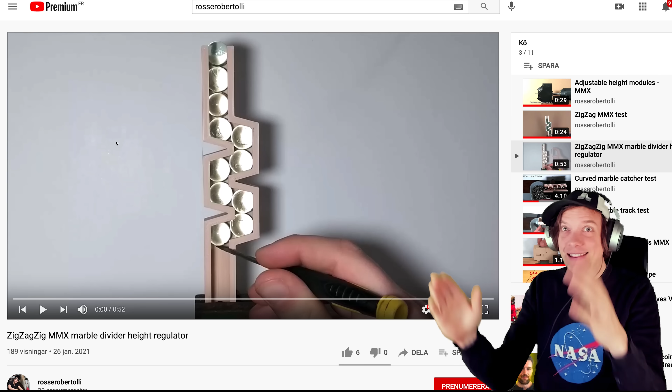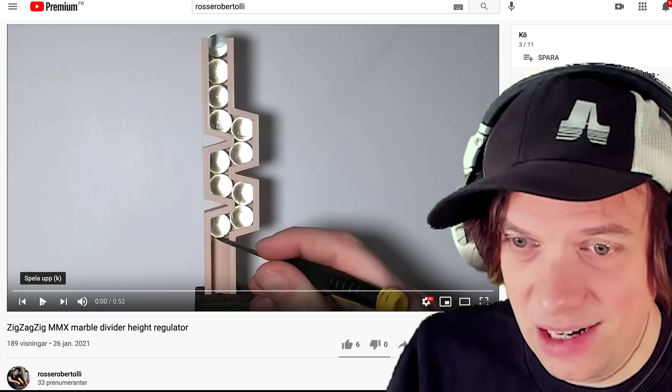In this design review, I will review some mechanism ideas from Rosse Robertolli. Rosse has made all these prototypes and these videos. Perhaps the original ideas are from Rosse himself or from the Discord community. I don't really know. Let's go.

Next design. What is this for sorcery? Curved marble catcher with constant contact radius, regardless of the height of the marble queue. So this is for the top of the marble divider - regardless of the height of the marble queue, the free-flowing marbles would flow equally fast, I guess. Adjusting the height, cool.

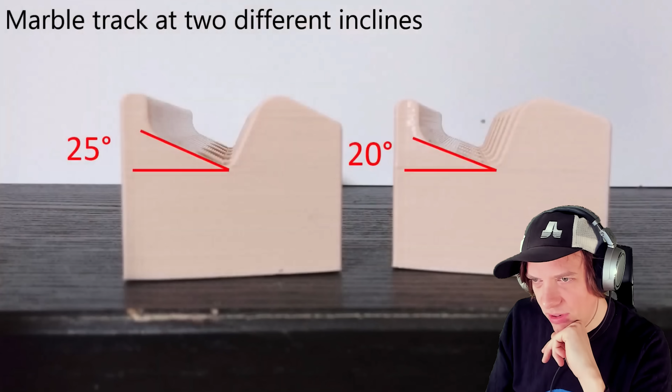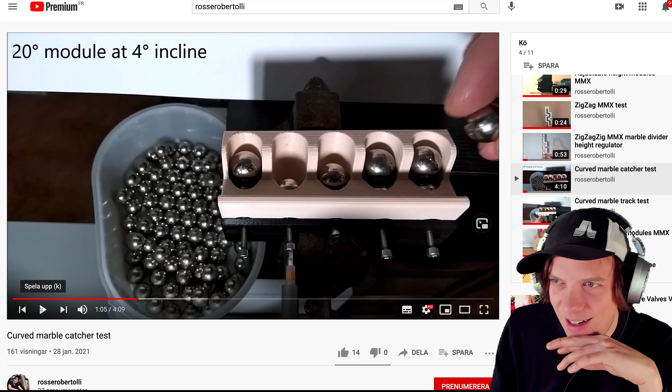4° incline - yeah, I think on the marble divider it's about 4. That is so cool. It's basically taking the same principle I have in my current marble divider, but making it unsensitive to top marble height. Simple, brilliant. I don't see a single marble on the floor also - clean floor envy.

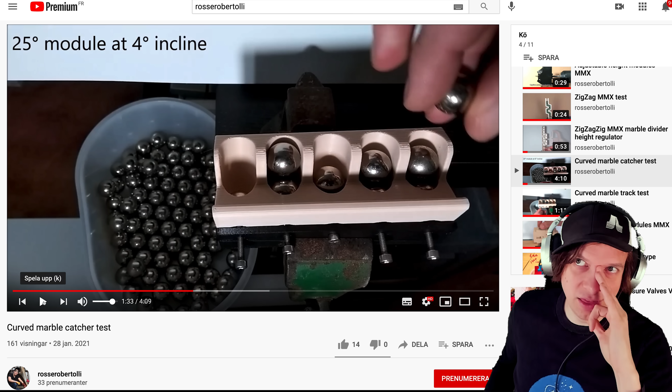Wow, this looks like it would totally work. At the moment on the machine, I think I will fight for my current marble divider, but this is just an amazing solution. I'll give this design 2 marble dividers. It's absolutely great. Next design.

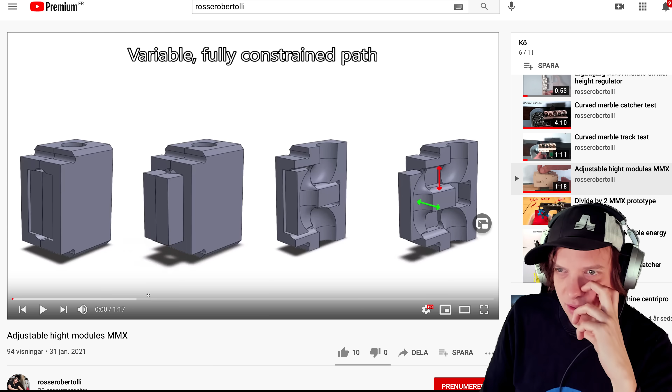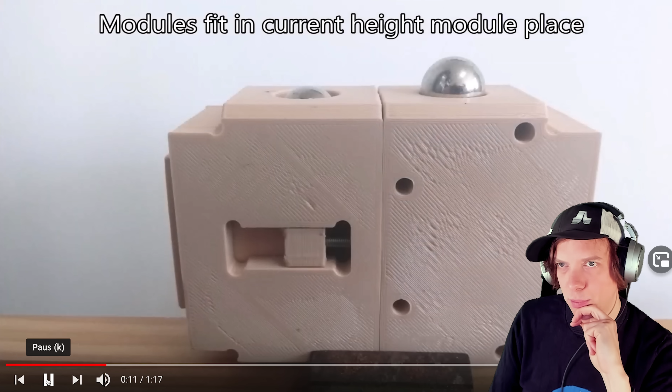So this I think I've seen from Andre Schur - the idea. This is the adjustable height modules, for the top height, CNC machinable from plywood. Oh, you already designed it. Wow, 2 marbles adjustment - let's look at that again. Wow, modules fitting current height module place. That's awesome, I thought this was much bigger.

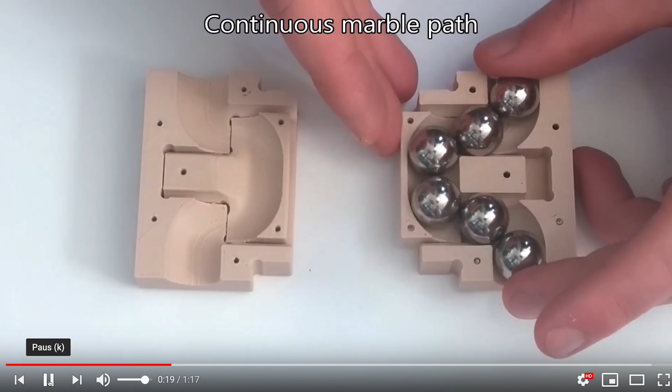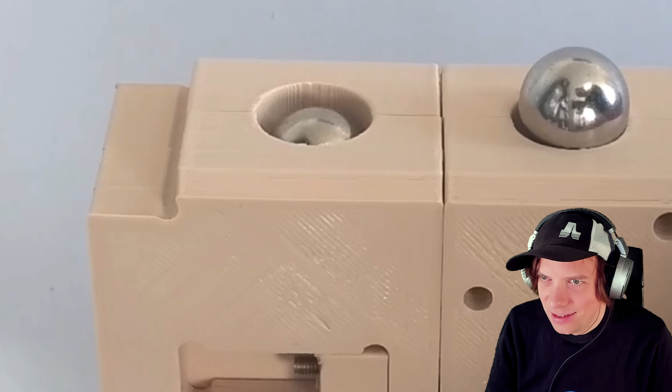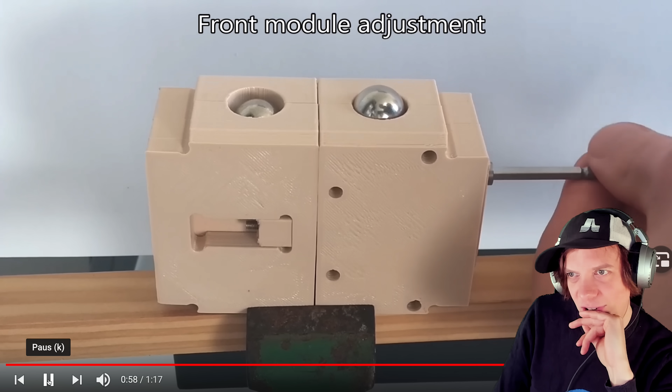I thought they were bigger. I didn't know I could fit them in. I definitely need to try this. Oh, this would be a dream. Rear lowering. Next design.

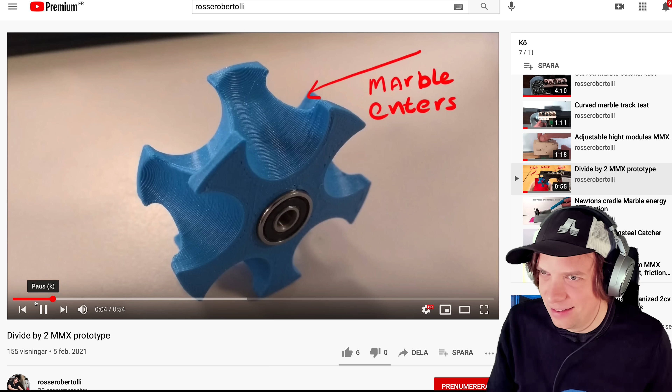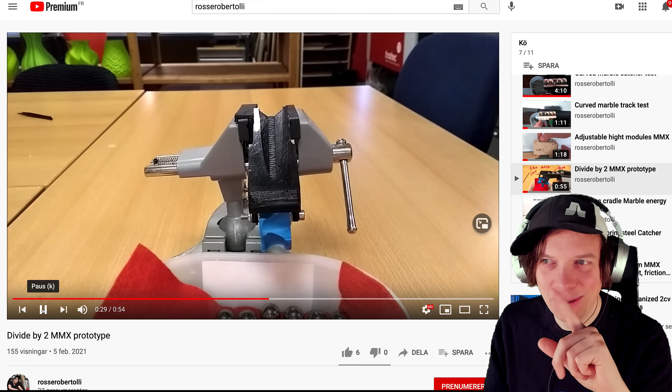What devilry is this? Divide by 2. Oh, that's so beautiful - yeah, it's like a flip-flop but much faster. It's brilliant. Oh wait, did you hear what I heard? There, that's a marble going on the floor, hitting like the bottom of a chair or something. It happens to the best of us.

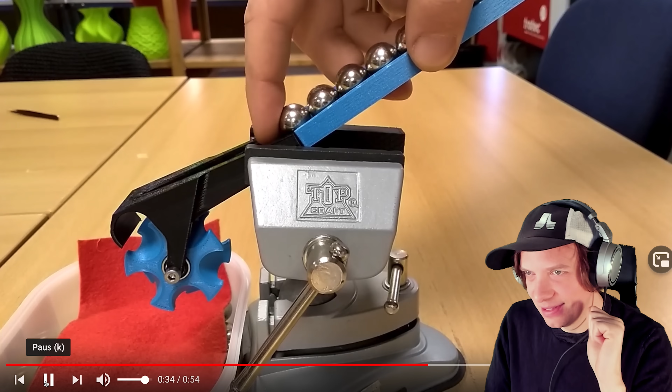Damn, I'm happy to see a fellow floor marble from someone else than myself. I'll give this design 2 flip-flops. Next design, here we go.

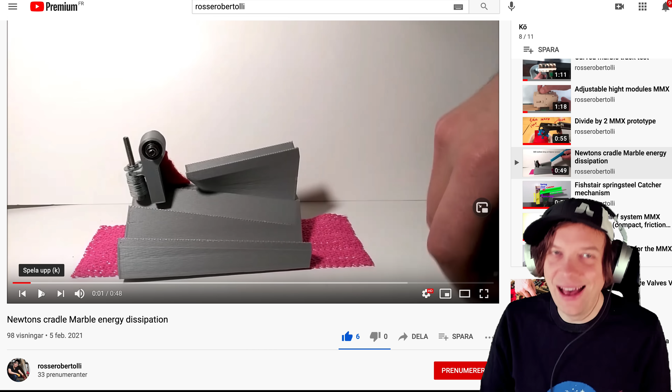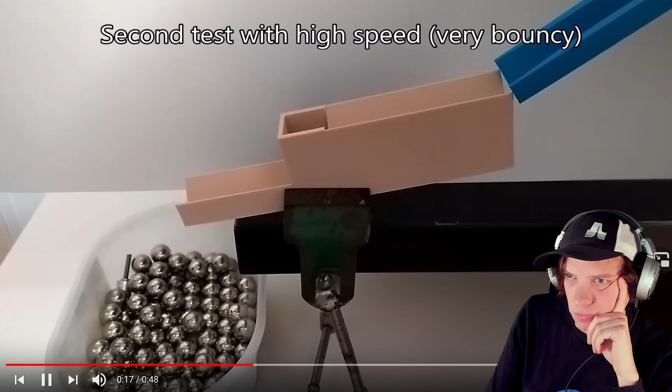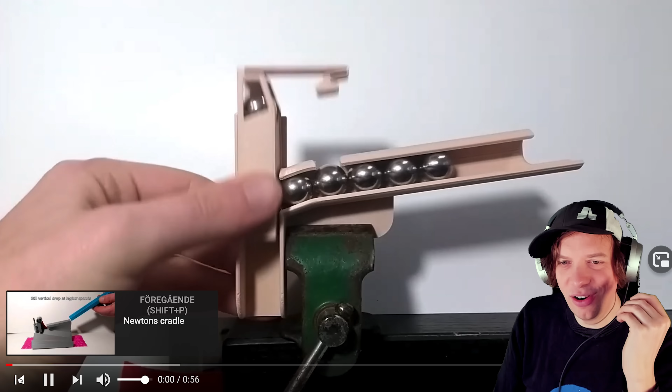Newton's cradle marble energy dissipation - like and comment, best video title on YouTube. Boom, and there is a washer stack - best washer stack on YouTube. Coming in hot, Newton's cradle washer stack, extra points. Converting the energy from the marble into the washer stack - that's what I mean with washer stacks, they are like taking care of all our energy problems.

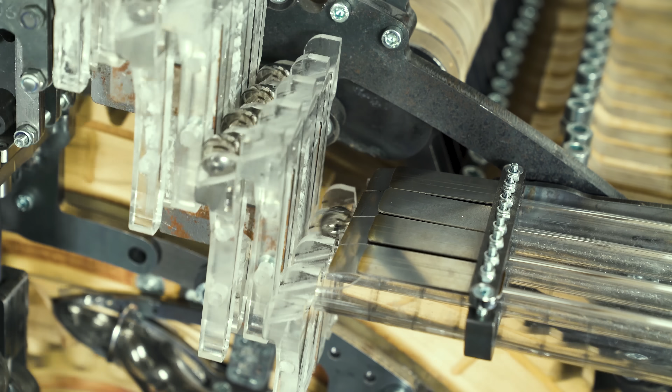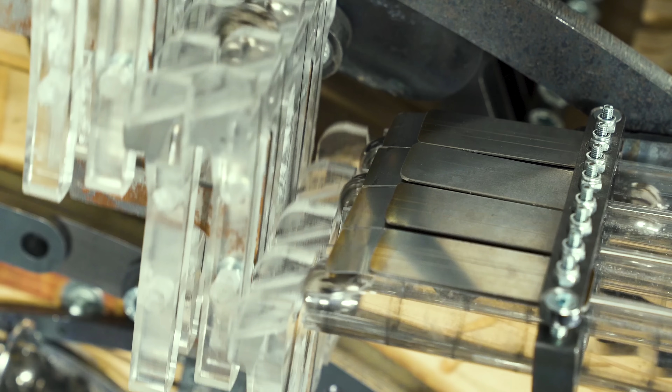Next design. Okay, this is brilliant right off the bat. Fishstair spring steel catcher mechanism. If you followed my video where I talked about the fish stair entry problem, there is an edge case that was demonstrated in that video where a marble gets caught on the edge of the fish stair and basically flies out of the machine. And I already see here what this mechanism does - this is brilliant. It would be pretty simple for me to put on the existing fish stair actually.

Fish stairs, the yellow, marble lanes, the green, spring steel, catcher.

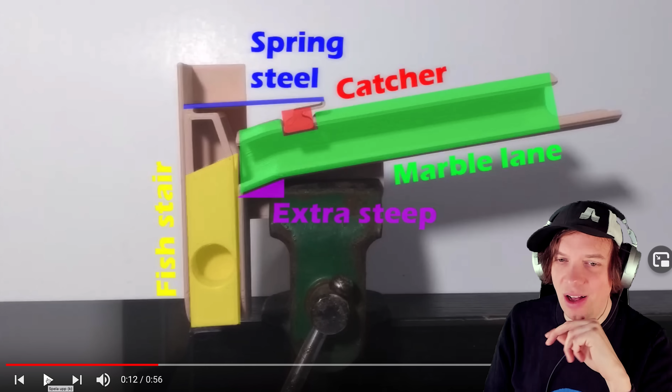Rosero, I have to give you so much credit for how you present these ideas, because there's no unimportant information. Everything is ultra clear, down to the point. I wish I could be as concise as you in my videos. This is absolutely spot on.

So this is the important part. Exactly in this position, you can see the step is half open now. There's a catching potential between the lane and the fish stair that is moving upwards. And at this very sensitive moment, the cue or a stray empty marble cannot enter.

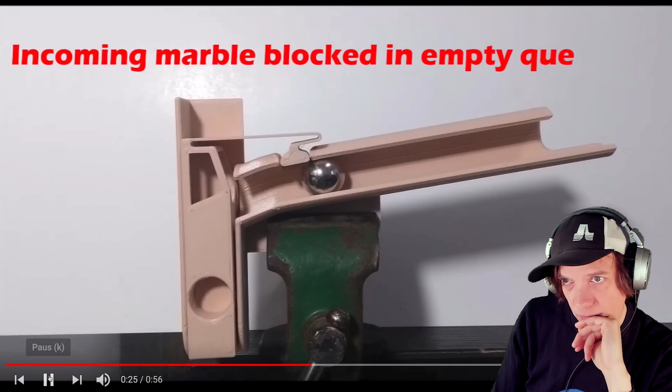So I only have this issue when the lanes are empty and the marble comes at the wrong time, but this will prevent that. Incoming marble blocked in empty queue.

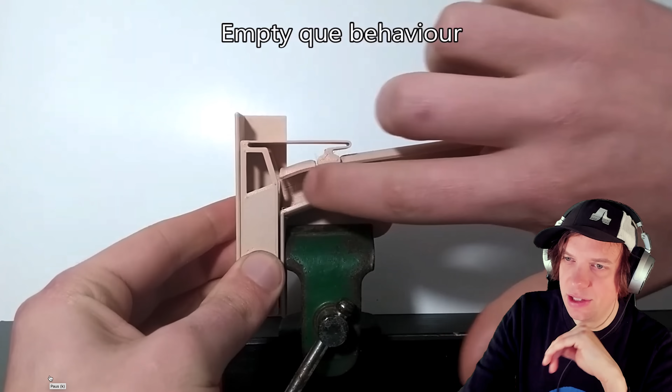Yeah, so as soon as the thing is open, the marble is caught. It's brilliant. It's so simple. Simple and elegant.

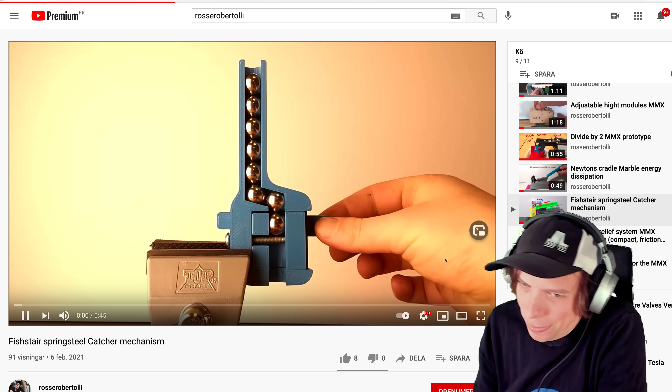Okay, we're going into sorcery of the highest class here. Pressure relief system, MMX Marble Gate, compact, friction-free.

I have to tell you a story about this. The first thing I did when I built the first marble machine, I shared a studio with my friend Marcus Timburius in Gothenburg. It was an old supermarket warehouse, moldy - when we moved away, they tore the whole place down. There was a car garage next door, so I was working in diesel fumes and plywood grind with no mouth protection. It was a lovely time, basically. We filmed the first marble machine video there, owned the internet.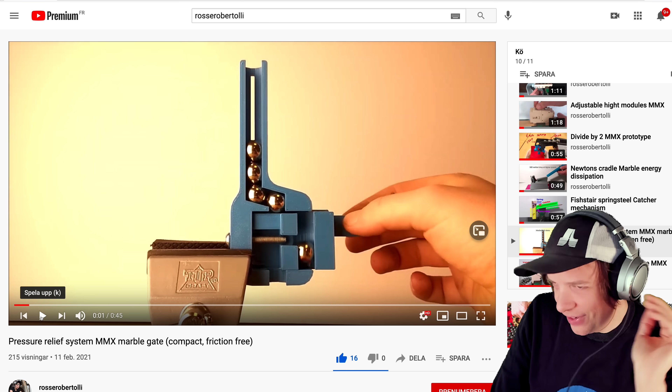In that studio, I built the first original marble machine, and I had the same issue there as I have on this one. I wanted to route the marbles down to a marble gate, but the pressure was too high. My friend Marcus Timbodius, I remember this so well - I think it was the first month - we were all sitting drinking coffee, and he made a napkin sketch of this design. He said, if you just take one marble like that, it will press into the wall and this marble will be free. I tried it 5 years ago, but I didn't build it precise enough. Now this idea, one of the first ideas for the original marble machine, is coming back, and coming back big, because this looks amazing.

So you see the pressure goes into the red lines, and you can see how small the red line is on the sliding gate. What gets me excited is that if this works, we have a one-fits-all solution - one solution we can copy 38 times on the Marble Machine X.

This goes perfectly back to what I said yesterday about my motivation to put on the new plywood pressure part - it's like, oh no, I'm still doing custom, you know? I have to do a custom thing for the hi-hat, a custom thing for the snare drum. This design blows all those issues out of the window. If I can use this solution on all 38 channels, that is what I really need to do.

Weighted drop setup. So there's an aluminum block clamped to a metal bar with a high quality clamp, I see, cut off with the handle cut off, cool. 2 kilo weight on top of marbles. Cool. No friction, high throughput.

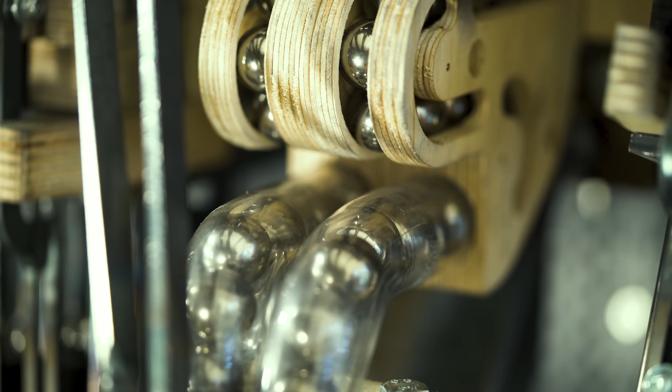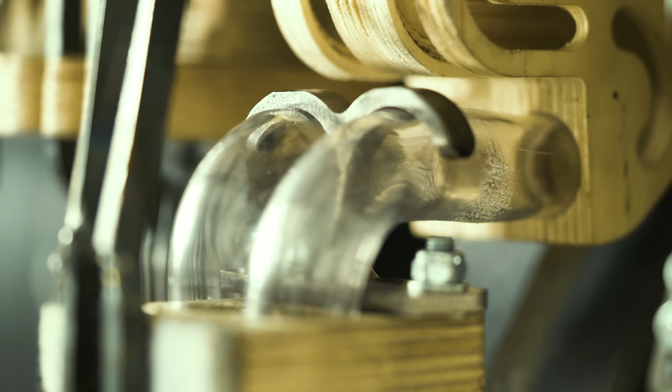This is brilliant. In the video where I was building brackets to hold down the PMMA pipes, I was suffering so much that I made a design where the PMMA pipe wasn't held securely. Ever since, I was thinking that I wanted to redo the top of the marble gate so I can insert the PMMA pipe much better. Every time I need to add an afterthought, it's probably something wrong with the original design itself - like, you can't just paint over rust on your car. You need to grind the part away, weld on a new piece, and do the paint properly.

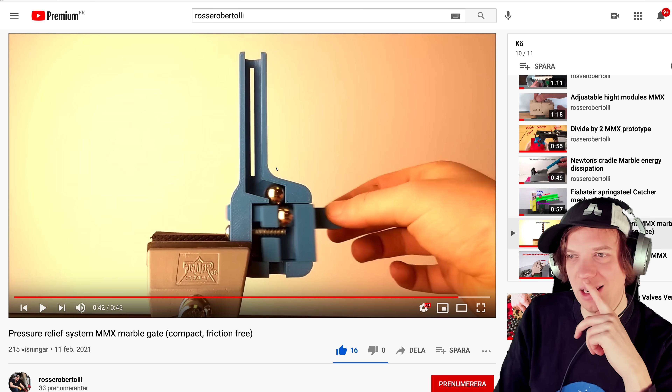And I can actually combine this idea with the pressure relief system from Rossero, together with my new idea for the top of the marble gate. I think we can have something that is really simple and elegant that engineers all over the world will approve.

Next design. So this is a variable counterweight moment arm for the divide by 4. Yeah, brilliant, because it went back too early - that was an issue.

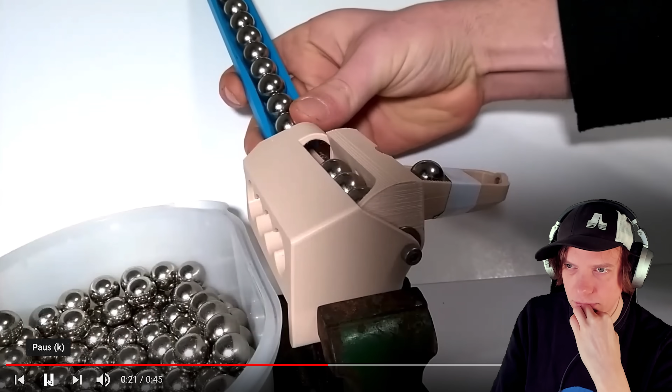So here is the whole point. It only tips back when empty. Check this out. Yeah, brilliant.

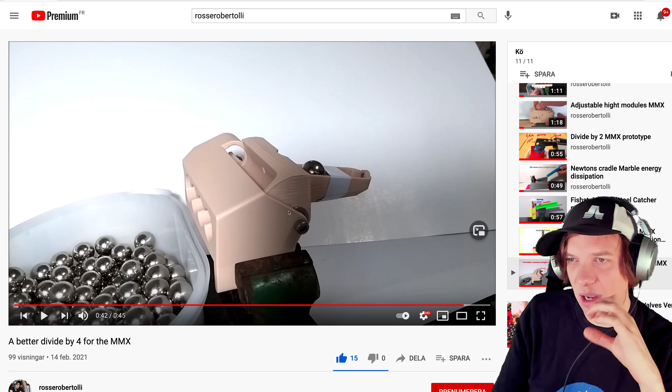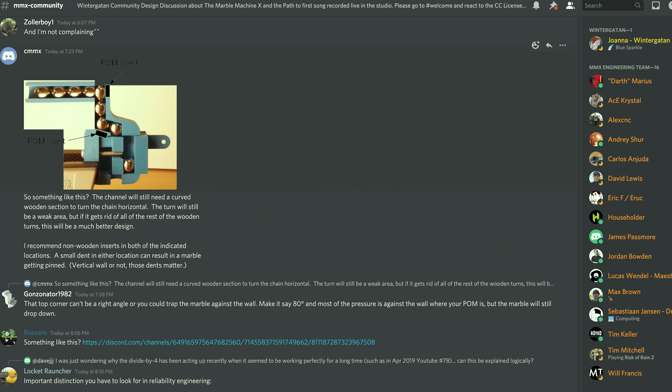If someone could CAD this in plywood and adjust it to the measurements of the Marble Machine X using the original divide by 4 design, maybe it's already done, and also set the insert for the PMMA pipe, I would put this on the machine right away. It's too cool. I've actually already started on the idea for a new marble gate that I'm going to prototype very, very soon. So shout out to Rossero for amazing prototypes and amazing YouTube videos showing them. And shout out to everyone at the Wintergatan Discord server, because there's like a hive mind there right now coming up with this amazing stuff.

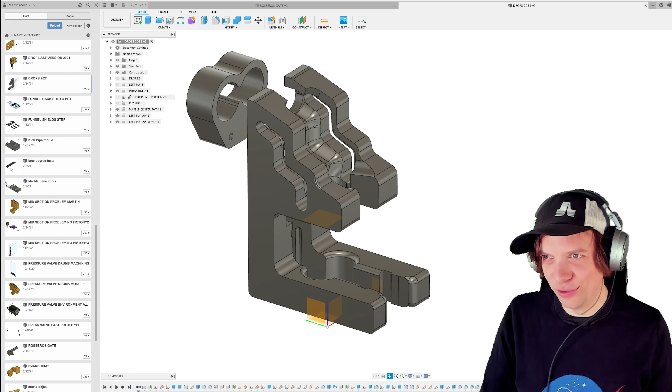This is a work in progress. This is where we were, right? I had the PMMA pipes coming in right here, and it didn't have a way to hold them down, and I had to bend them in a very, very annoying way.

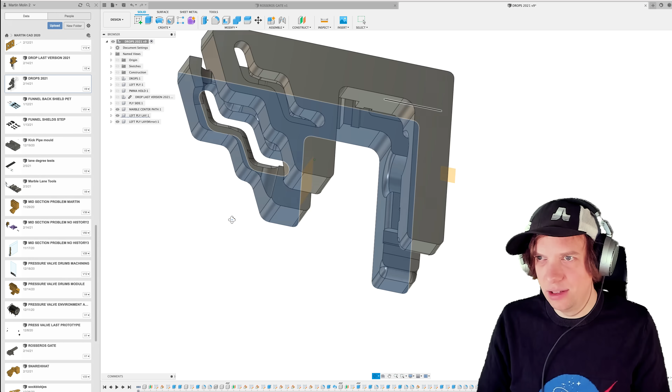In the new gate, I'm shifting the machining direction of the plywood completely. So I'm actually going to machine the plywood like this. And up here, you see the zigzag up here - that's Rossero's zigzag incorporated into the marble gate.

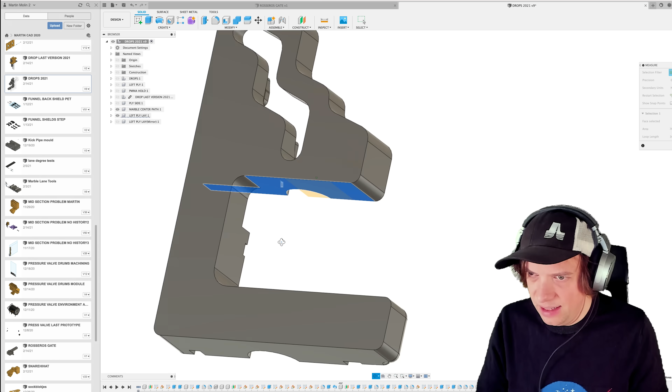When I machine like this, I can machine all these little pockets in the side of the plywood. And later, when we put the next piece next to it, that becomes holes for screws. And since this is one piece, the distance between here and here will remain perfect, and also the angle from the top hole to the bottom hole. Because I had issues, if you remember, in the video where I added the brackets, that the top thing was torn to the side and the marbles actually got stuck. So again, like I have a design that has a flaw, I fix the flaw and I cause another flaw. And that's just like, oh no, no, no, no, I don't want that.

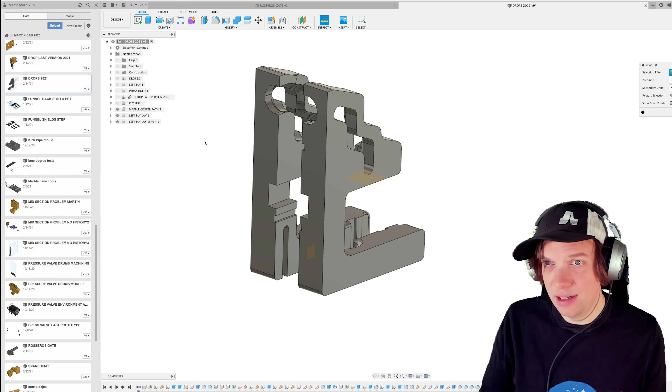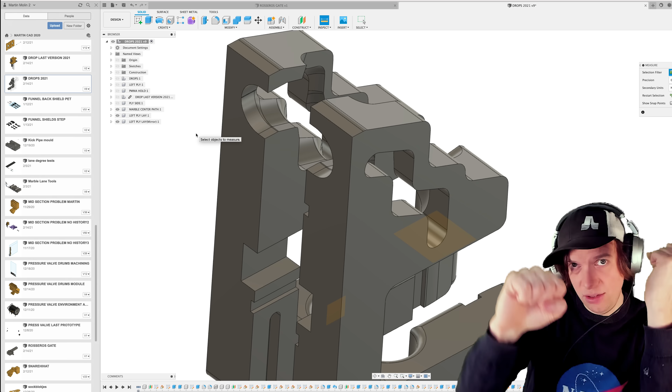And here comes the added benefit, what my idea that I want to combine with Rossero's - it's the PMMA holder. Imagine when I bend the PMMA pipes, I will bend them up to here with no holder. I don't have a hole that I have to get the pipe into and get it in there - it's super difficult to make those bends. Instead, I have a flat surface. I can just slide the pipe around, line it up with the opening on this flat surface. And when I'm done with the pipe, I can let it cool. I can take everything off, enter the PMMA holder. So I put it on the pipe, and this will then be screwed on to my rig like that.

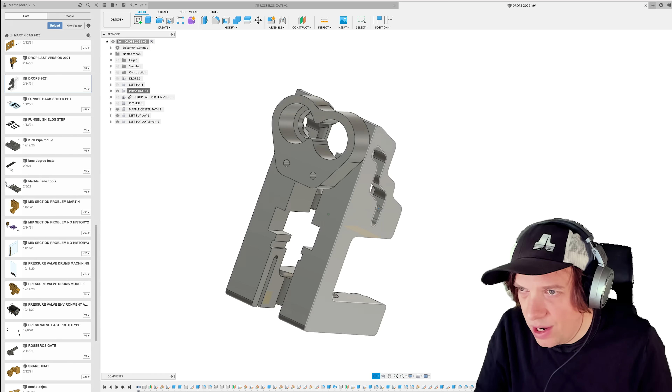The same idea that Rossero showed with the marble height modules, with accessing the screw from the front. I will be able to access this screw from the front through this opening. I can move this for now - this is not how the design is going to be, but just to illustrate. You can see that we cut the slot in the opening here, so I will access the screw here. And this screw hole is created from the sideways machining on the CNC machine, so I don't have to drill it. And you can see that it's perfectly lined up with the screw hole here of the PMMA holder.

I'm going to work on this today and hopefully machine the first prototype. It should work - it really should work. And then I can basically bam, bam, bam, make 38 of these and go on a world tour.